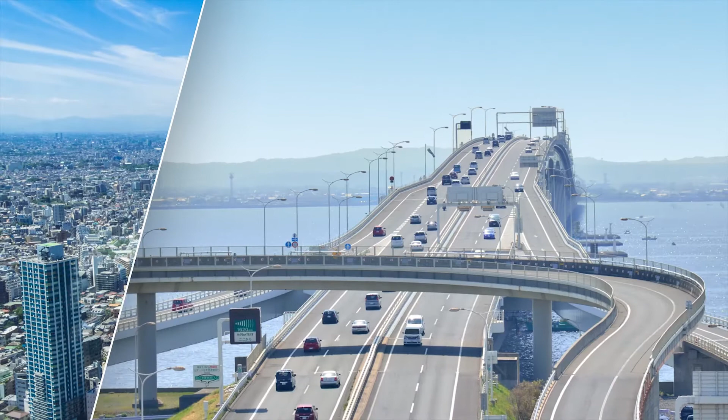It has been Japan's pride to provide exquisite quality in housing construction, as well as social infrastructure, among the world. Third-party accreditation organizations certify such quality in the field of construction business in Japan. One of them is the Japan Testing Center for Construction Materials. We were established in 1963 to provide quality certification for housing construction and social infrastructure of Japan.

The Japan Testing Center for Construction Materials consists of 3 laboratories, which are Central Test Laboratory, Construction Materials Test Laboratory, and Nishi Nihon Test Laboratory, and 3 other dedicated headquarters, one for ISO Certification Service, one for Performance Evaluation Service, and one for JIS Mark Certification Service. Among them, let us introduce Central Test Laboratory.

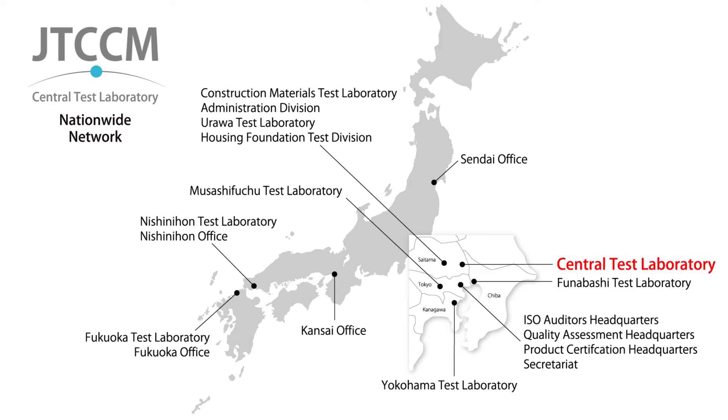The Japan Testing Center for Construction Materials, or JTCCM, was inaugurated in 1963 in Soka City, Saitama Prefecture, and has experienced significant achievements over half a century. As you can see, we have expanded this business to cities across Japan to provide a wide variety of services to customers. Among various services, the Central Test Laboratory conducts quality assurance testing to verify quality requirements for materials and components used for buildings and civil engineering structures, thus playing a vital role dedicated to the social infrastructure.

There are several major features, one of which is that we conduct fair and highly reliable testing as a third-party testing organization. The second is that we offer a wide variety of testing options on our menu. We not only respond to customers with versatile requirements, but offer one-stop solutions through a quick response system and keen partnerships and cooperation with 4 specialized testing areas of materials, structure, fire resistance and environment.

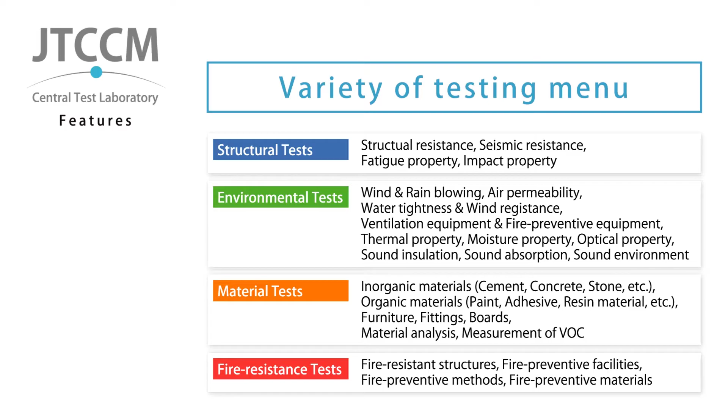And the third is our reinforced testing facilities. Lately, in order to meet more diverse testing requirements, we added a structural testing site and dynamic wind load testing site, deploying more advanced and larger testing machines. Next, let us guide you through our testing scenes, from the structural group, the environmental group, the material group, then finally to the fire resistance group.

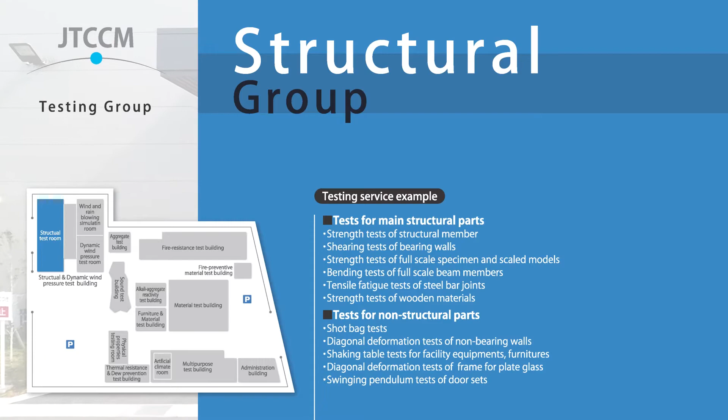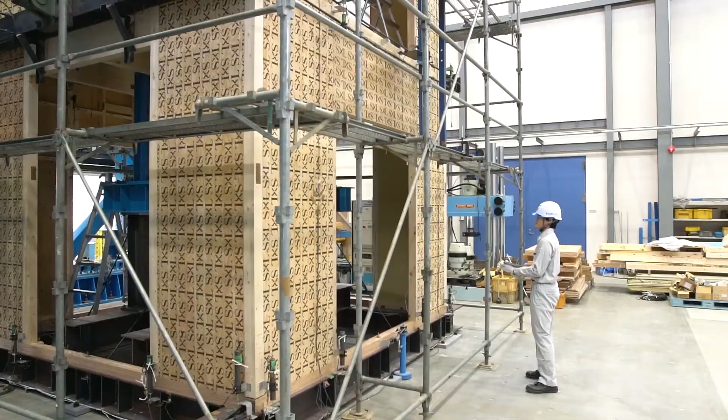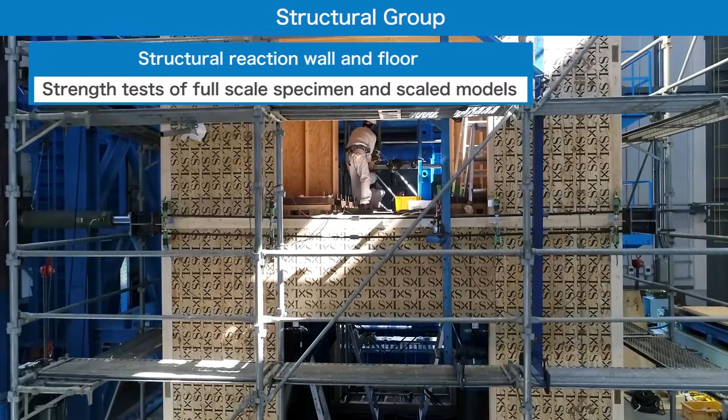The structural group deals with strength tests on large-size construction materials, components and joint components. In October 2016, we completed a new testing site, twice the size of the original one, and it has been in operation since April 2017. A strength test on 2-story type test specimens is performed using the structural reaction wall and floor. The structural reaction floors occupy an area of 13 meters by 8 meters. It can assemble reaction walls for various requirements by clients.

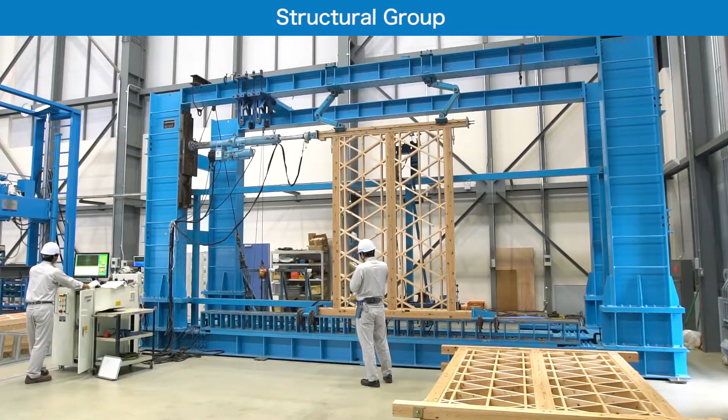A testing system for wooden structures is used for shearing tests of wooden bearing walls requiring government certification. This testing system, due to its 3-dimensional structure frame, can be extensively used for horizontal pressure tests on ceiling units for compliance with technical standards on ceiling poles or handrails.

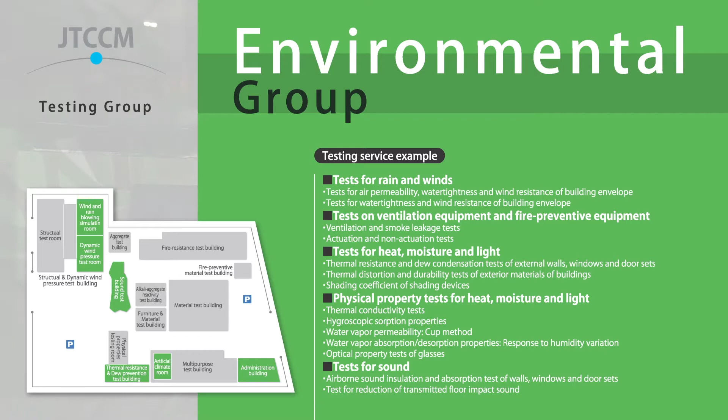The environmental group conducts tests on external natural environmental factors such as rain and wind, as well as indoor environmental issues such as heat, moisture, light and sound. In October 2016, we also built a new facility that allows tests with a natural external environment of wind and rain, thus allowing us to perform dynamic wind pressure tests with larger size test pieces than previously, as well as tests with actual winds.

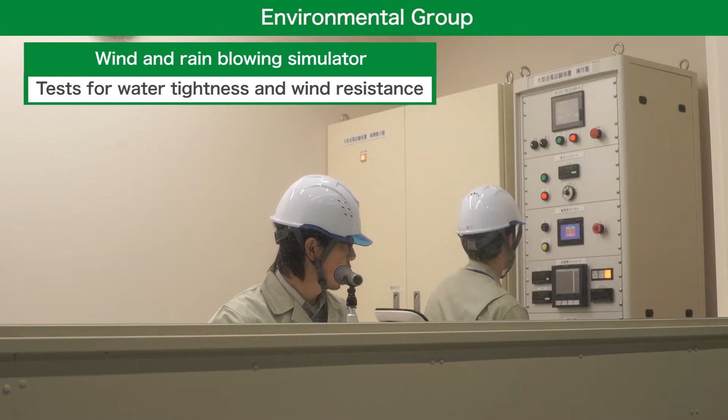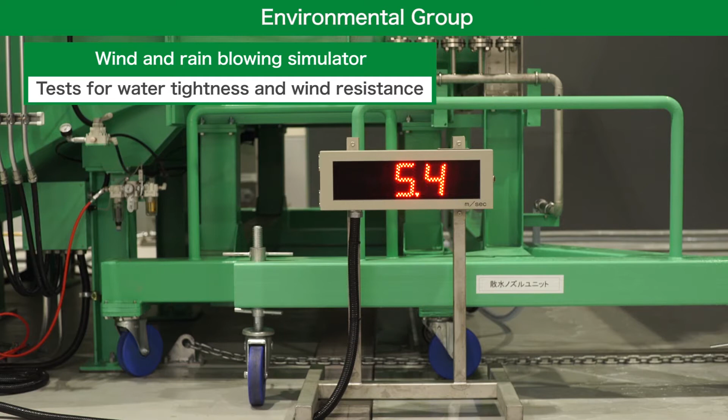Tests for water tightness and wind resistance are performed for actual winds over roofs, walls, building fixtures, solar light modules and fences, using the wind and rain blowing simulator. This equipment can reproduce 3 different types of wind: steady, pulse and gust, with wind speeds that can range from 3 to 66 meters per second.

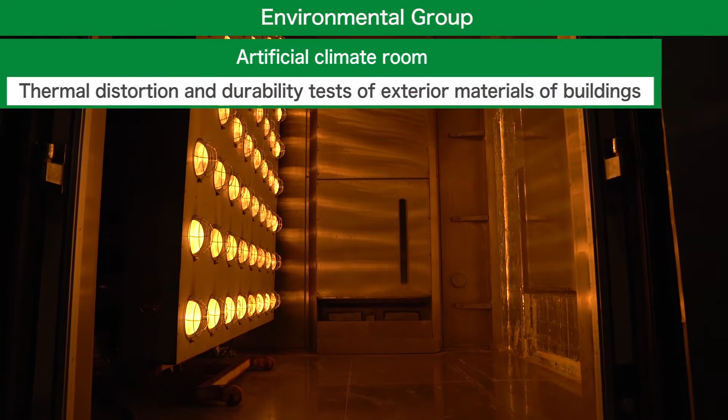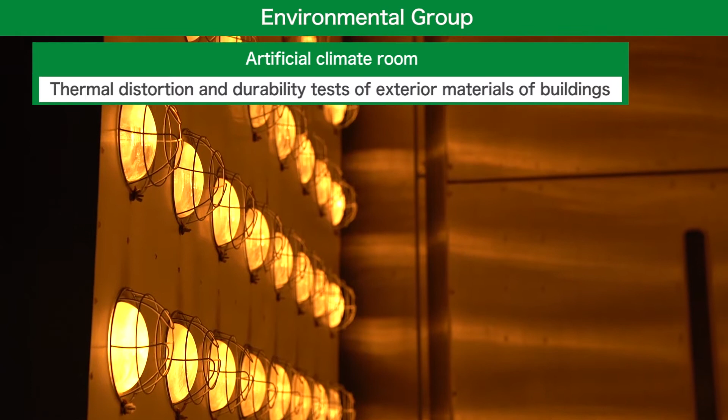Thermal distortion and durability tests of exterior materials of buildings are performed in the artificial climate rooms, allowing temperature settings ranging from -20 degrees to 40 degrees Celsius and 40% to 90% relative humidity. The outdoor chamber is equipped with infrared light and water spray nozzles, enabling solar beam equivalent heat and extreme changes of temperature.

A test for reduction of transmitted impact sound by floor coverings is performed by applying impact to the specimen with a standard heavy impact sound source, and the floor impact sound level is measured on the sound receiving room side to calculate the amount of reduction.

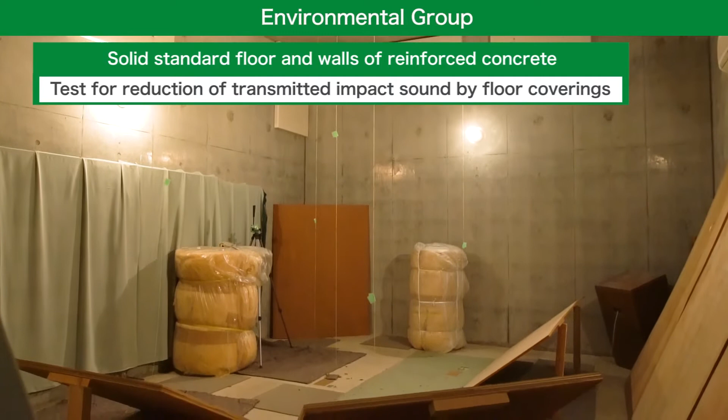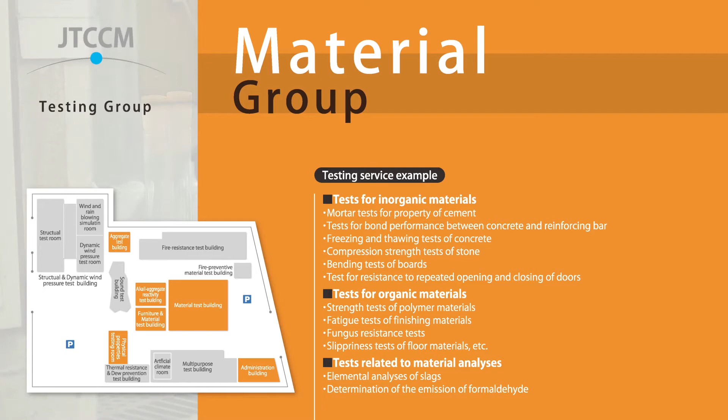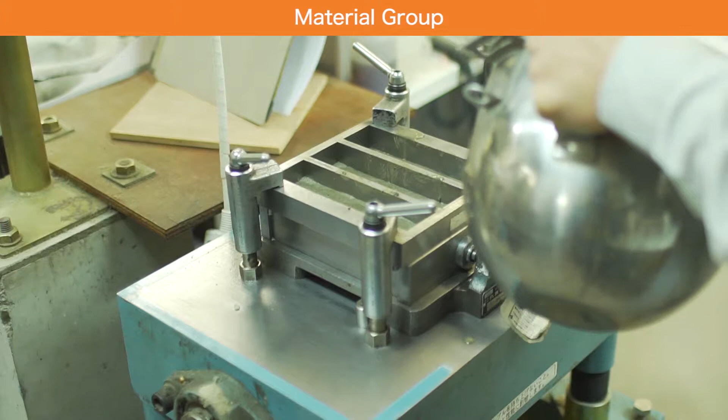The material group is compatible with various building materials, ranging from mortar and concrete materials to polymeric materials, furniture and fittings. In addition to JIS, we are also testing in compliance with specifications such as NEXCO. The mortar test is conducted as quality control of cement, mixing mortar and admixture, which are the materials of concrete, and as a physical property check of mortar for repair and mortar for finishing.

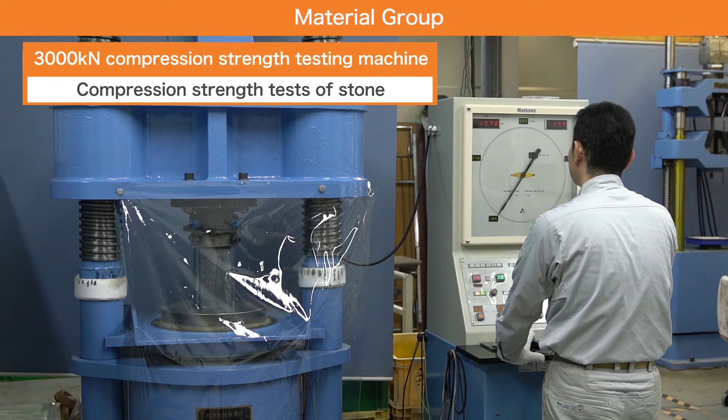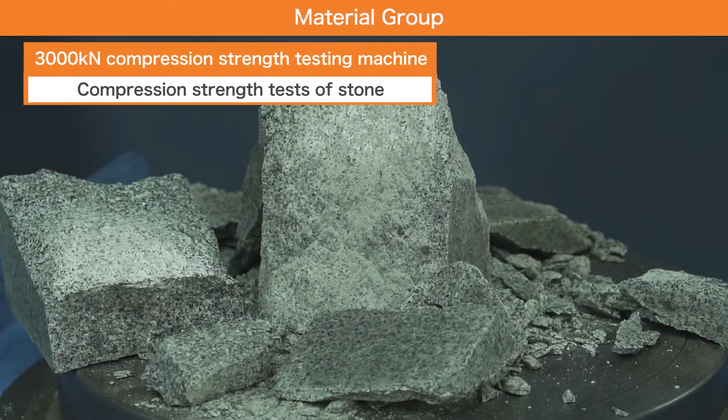The compression strength test of stones examines the compressive strength of stone used for finishing materials and rough quarry stone using a compression testing machine. In the strength test of polymer materials, we use an electromechanical universal material testing machine because the target materials are diverse and small load measurement is required. Further, by using it in combination with a temperature chamber, it is possible to conduct a strength test in low and high temperature environments.

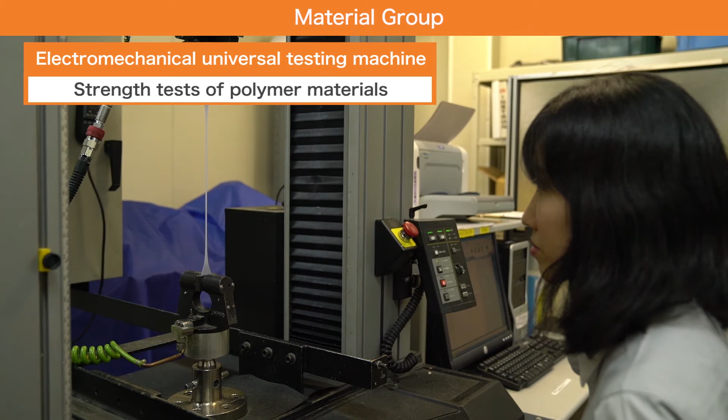As a designated performance evaluation institution based on the Building Standards Law, the Fire Resistance Group tests and evaluates a variety of fire prevention issues related to structures, facilities, methods and materials. We also conduct flame spreading tests on fire-preventive materials and tunnel repair materials such as building facilities.

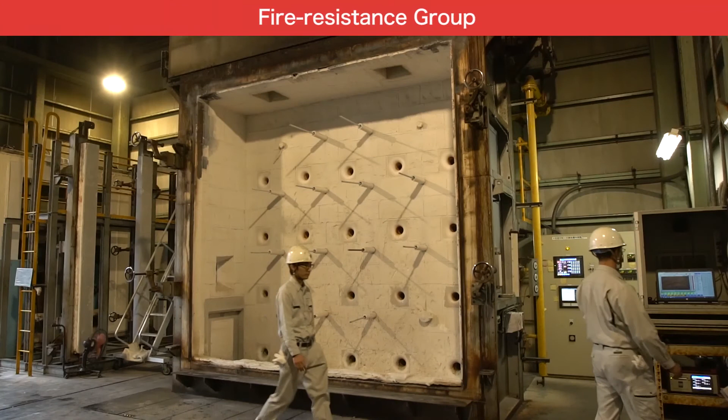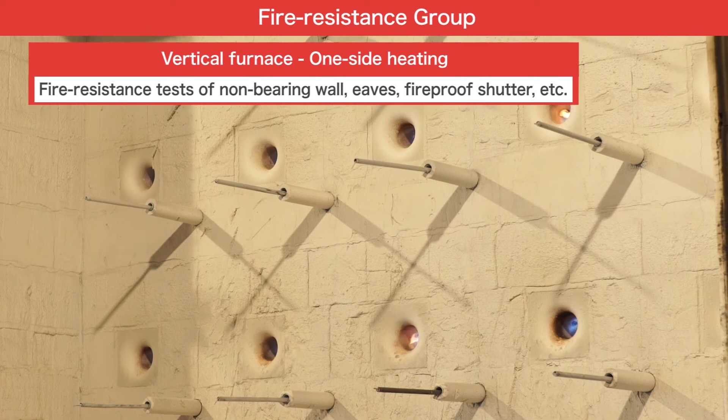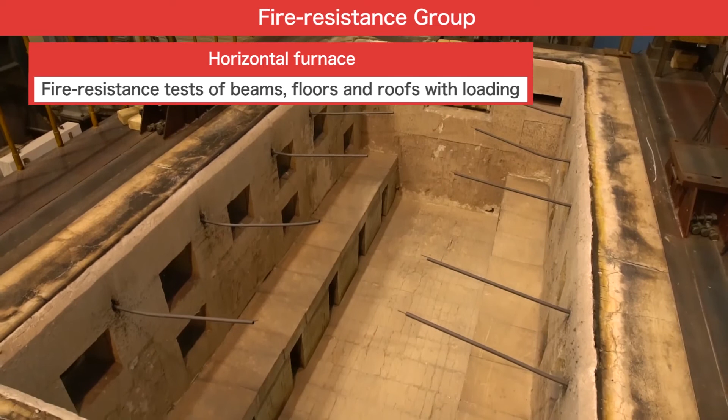Using a vertical furnace, a fire resistance test can be performed by heating vertical non-load-bearing materials that constitute fire prevention zones, such as non-load bearing walls, eaves and fire doors, as well as pipes and cables penetrating walls. Fire resistance tests using a horizontal furnace can be carried out by heating, under loading, comprehensive horizontal materials such as beams, floors and roofs of various structures.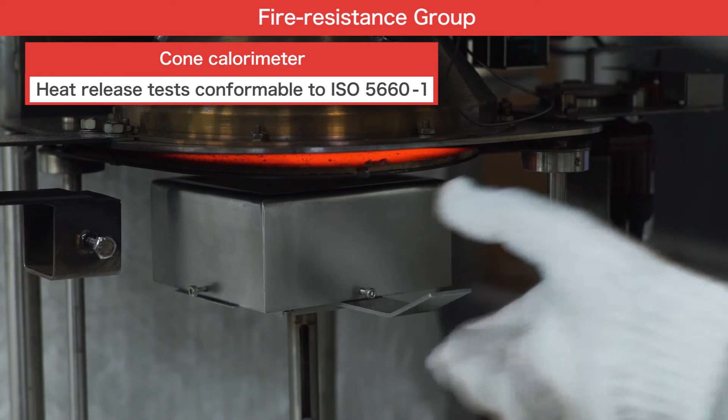In the heat release test, it is possible to check the combustion properties of wallpaper, film and boards that are subject to restrictions on interior finish. It is a secure social foundation that we hand down to the next generation. In order to realise this vital mission, we at the Central Test Laboratory promise to continue to grow with our customers.